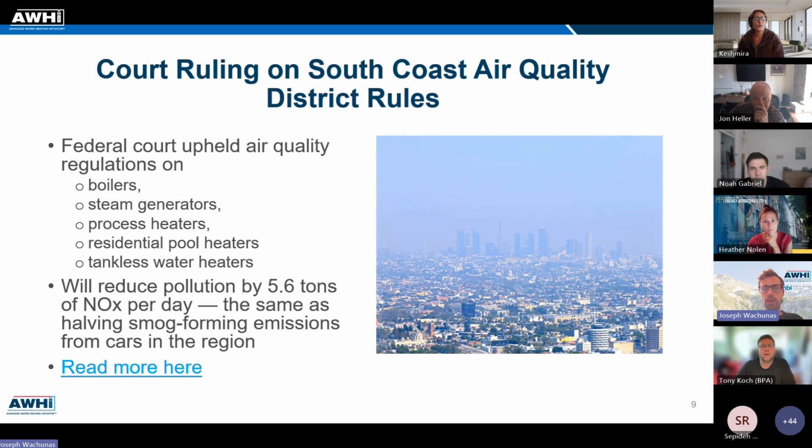Thanks, Joe. Yeah, so just a couple quick updates here on our small commercial study. We have a couple of grocery stores participating in San Diego. It's a couple of Kroger sites, and the M&V installs are going to be happening in August. Just for context, for those who don't know about this project, we're going to be monitoring about 30 heat pump water heaters in small commercial applications throughout California and the Pacific Northwest. So these are two of those newer sites.

We'll also be installing monitoring and verification at a church and a restaurant in Sacramento in August too. So lots of upcoming installs and a lot of cool data flowing in on the performance of these systems. And we also have 10 or so sites identified in the Northwest. So a lot of great recruitment going on. Kudos to Ecotope for recruitment help and all the installs as well. I'm excited in a future AWHI working group call to present on some of the data we have from Ecotope's great dashboarding app. Next slide.

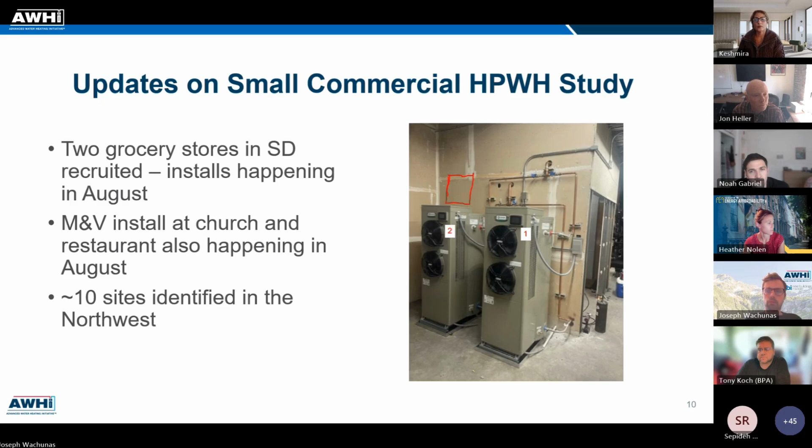They, instead of using a traditional hot water storage, they actually use a glycol mix to basically store thermal energy at very high temperatures and provide quote unquote instantaneous hot water through the heat pump water heater system. In addition to the 4 heat pump water heaters pictured here on the right, there is also a tankless IntelliHot gas backup system. So it's a very cool dual fuel setup here where hopefully gas is going to be of extremely limited use.

The reason we opted for a gas backup here instead of electric resistance, like a commonly used swing tank, is that the electrical upgrades going up several hundred amps of capacity or even more, I think it was 600 to 1200 amps, is what would have been needed. If we didn't opt for a gas backup, it would have been $100,000 roughly just for the service upgrade. So this was a huge money-saving opportunity. It does keep gas in there, but it dramatically reduces costs, and gas is kind of a last resort in the event of a failure or in extremely cold temperatures. You can also see that it's installed in a bit of a buffer zone there, so there have been some cool engineering applications for ensuring there's enough airflow in the space.

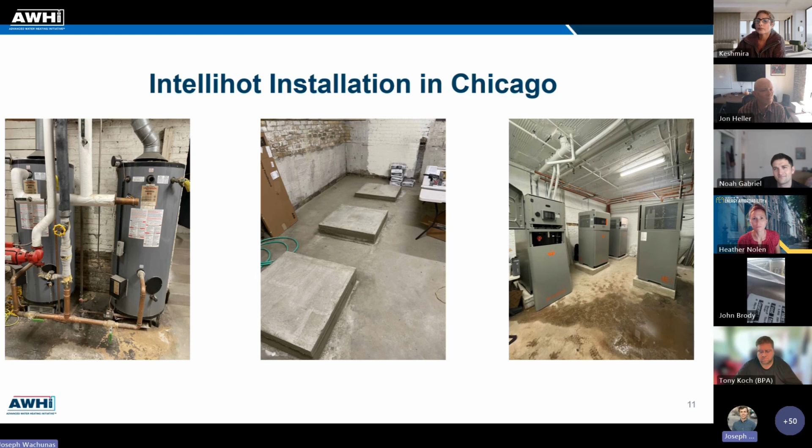Thank you, Joe. Well, I think we're kicking off next - is this, if I flip the title around, is it Made in America Grid-Enabled Commercial Heat Pump Water Heater Systems by chance? Grid integrated, they are. Oh close. AKA, also known as MAGIC, acronym award of the year.

We're going to learn a little bit about some installations of large systems, both in California and New York, pursuant to - is it pursuant to that project or separate from? John, separate from the one we just looked at? Is this part of the MAGIC demonstration, these two studies? Correct. The New York one won't be, though, right? The California one - yep, the California one, exactly. Okay, thank you for the clarification.

So now that we've got our notes straight, I'm just going to introduce it again. As part of a MAGIC proposal, which is part of a DOE funded project, in addition to some work going on with energy affordability, we have some demonstrations of large heat pump water heater projects, both in California and New York. So let's kick into it and start hearing what's going on, and then we'll wrap up with the load shift study. Over to you, Heather.

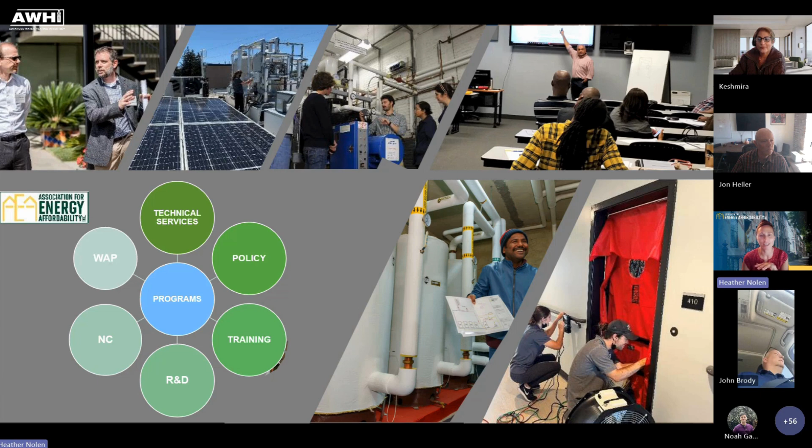So one of our WAP projects is 850 Bryant. This building is located in the Bronx, the northernmost borough of New York City, in a neighborhood called Hunts Point. This is a low-income building, and they were eligible for the Weatherization Assistance Program.

A few facts about 850 Bryant: this is an older building, pre-war, mid-rise, with 48 apartment units. The existing heating system has a hot water distribution, and the electric metering is direct.

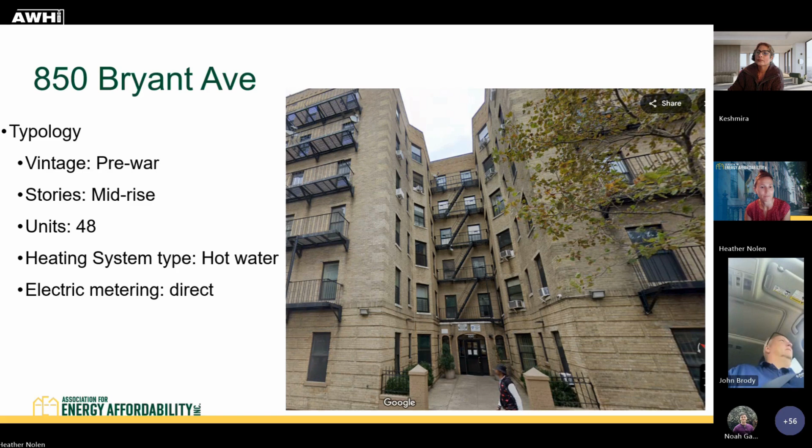So what did we do at this building? The building is still undergoing the Weatherization Assistance Program scope of work, which includes low flow devices for water fixtures. All lighting has been upgraded to LEDs with appropriate controls. We replaced the double hung windows with UPVC tilt out windows, and we're upgrading the ventilation system to meet ASHRAE 62.2. On top of the standard weatherization scope of work, which is a great base for improving energy efficiency and reducing energy usage at the building, the base step for decarbonization, we were able to go beyond that with an electrification scope of work.

This is a pretty deep scope of work that we implemented in 2 phases. Part 1 is what we'll highlight today - that was the heat pump for domestic hot water, where we worked with Lars. The second portion is getting under contract and will be installed this fall - a heat pump for space heating, which will include an upgrade to the existing hot water radiators in the apartments to include low temperature radiator panels.

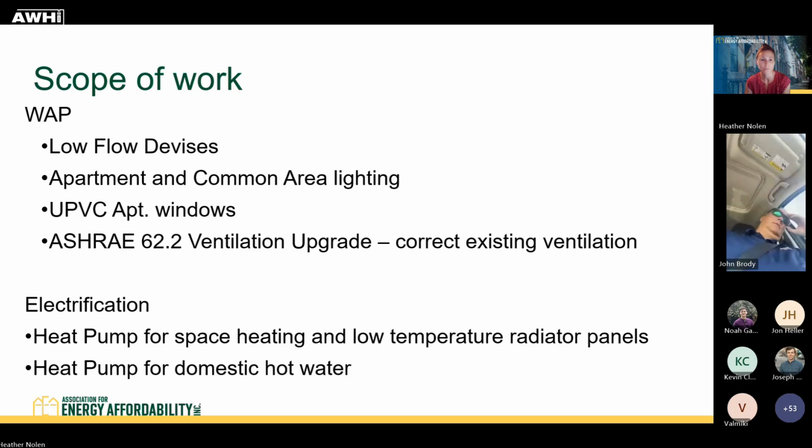These are 2 low temp radiator panels. We're going to leave the existing hot water baseboard in place and tap off of that. In the bathrooms, we're putting a nice towel warmer, and in all other spaces in the apartments, we're going to be putting these low temp radiator panels, tapping right back into that existing distribution network. This will allow us to drop the circulating temperature of the hot water loop significantly and take the benefits of generating that low temp, warm water distribution from the AirMax units.

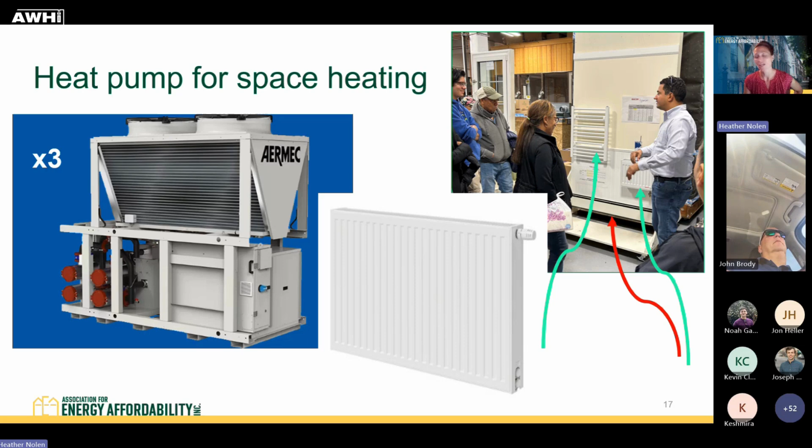These will be installed on the roof this fall. But to get into why we're here, the highlight of what we want to talk about is the domestic hot water electrification at this property.

It was really fun earlier because I heard you say something about throwing a party for heat pumps, and we did. I do want to give a shout out here - I see John Brody on the line, and I'm sorry you weren't able to join us for this party, but we've got John's colleague, Kevin Gauthier here. This is Kevin on the right-hand side, and then we have Greg Rath from Rath Associates on the left - he is our local rep. It was really through the help of working with Rath Associates and working directly with Laars that we were able to find this perfect fit for this piece of equipment at this building and make this project happen. We did throw a big party at it because it was meaningful to us, to Laars, and to the building and the owner.

850 Bryant is part of a larger portfolio of affordable housing in this area of the Bronx. The owner is really mission driven to serve the community. In addition to low income housing buildings, they also have a number of shelters in their portfolio, and they invest a lot in the community. Going beyond providing direct services to residents, they are also interested in making investments in their buildings that serve the building's best interest for the long term - investments like the UPVC windows, making sure their entire portfolio participates in the WAP program, and looking for ways to decarbonize the building, to get off oil, get off gas.

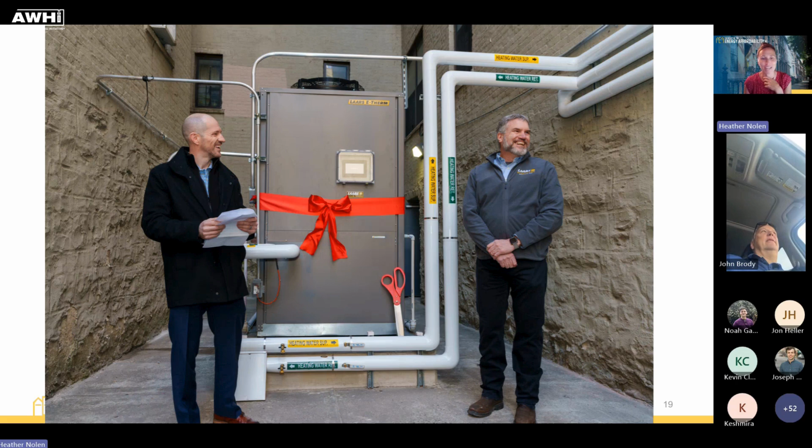So how do we celebrate? Well, of course, the big ribbon cutting, confetti cannons, and there was some champagne.

This project was made possible because we had funding from a lot of entities. Highlighted in this backdrop, our main funders are the Weatherization Assistance Program, and our local entity, HCR—that's New York State Homes and Community Renewal.

We also wrote a grant and were awarded funds, partnering with Enterprise Community Partners, to get a DOE grant for enhancement and innovation. That project was to do the base WAP scope of work and then go beyond weatherization to do electrification. Right now electrification isn't one of the approved measures under the Weatherization Assistance Program, so we used the Enterprise funds to go above and beyond and help afford this electrification program.

We needed a bit more money too, so we were able to use HEAP funds for this project—HEAP stands for the Home Energy Assistance Program. That was another grant we wrote to get funds. So just to make the domestic hot water project happen, we did weatherization first and then used those two funding sources to make it happen.

In order to do that last part of the project I was talking about, the heat pump for space heating, we've brought in two to three more funding sources to make that project happen as well.

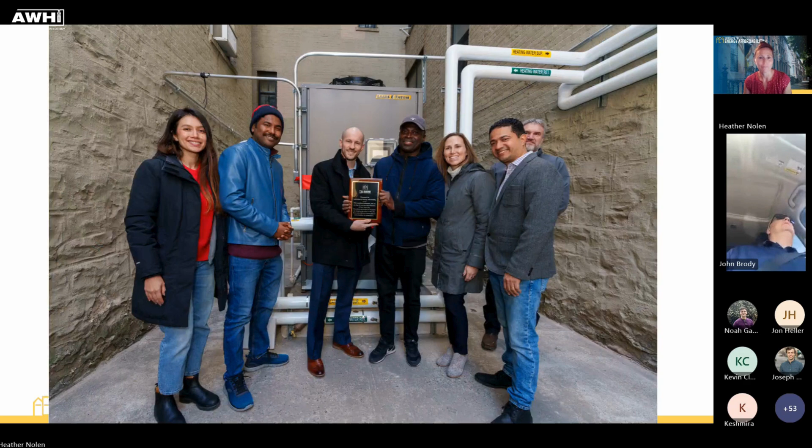Here's a shot of our team along with Greg Rath from Rath Associates, our local rep again.

So that's the unit outside. This is a 48-unit building, and we're able to serve the entire domestic hot water load with just that one unit. We did increase storage capacity inside. When we were first speccing this project, we had thought about using two outdoor units, but we were able to do a combination of storage inside and sizing of the outdoor unit to go with one outdoor unit and adequate storage inside, to pick up 100% of that domestic hot water load.

Currently we do have the gas-fired boiler still tied into the controls—if needed, it can come online. But soon we will have the heat pump water heater replacing that space heating boiler, and after going through this past winter, we're confident we'll be able to use the Laars eTherm to meet 100% of the load moving forward for this project.

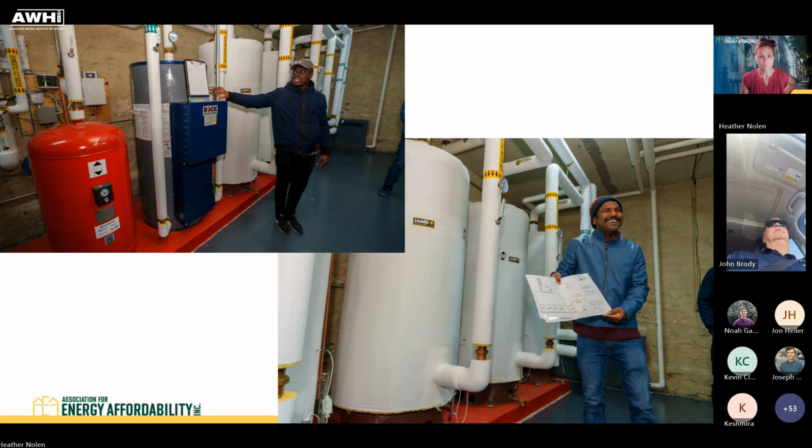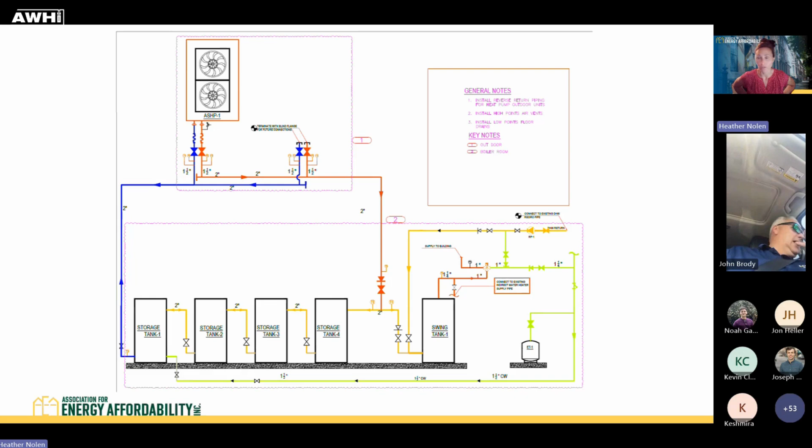Here's a quick overview of the specs of this building and how we were able to wire and plumb this project. One thing that worked out really nicely is we did not have to upgrade the electrical service to the building to meet the domestic hot water load, which worked out really nicely for us.

This building also has—which is really odd for New York City—a really sizable empty mechanical room, so we had space. We were able to put in four of these 200-gallon storage tanks, with nice space inside and close proximity to the outside, letting us site this unit and tie it in. So spacing and configuration really worked in our favor here. It's rare that we find an open space in a mechanical room, but we were able to really take advantage of it in this situation.

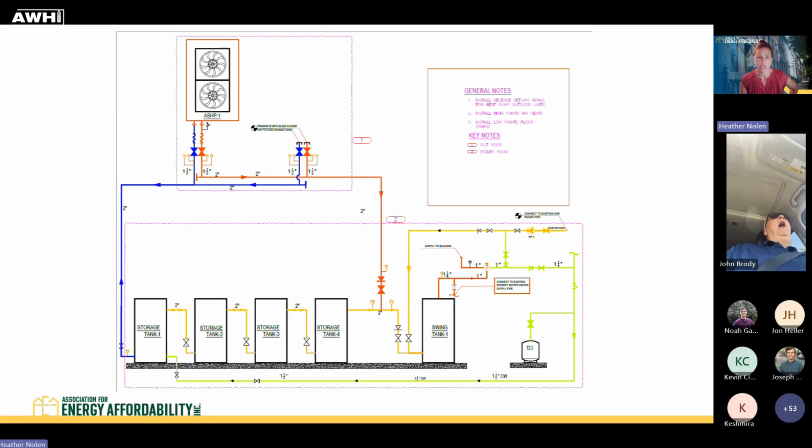I wanted to take a step back to say, why are we doing electrification? Because this project represents the beginning of a sample for us. We've done a few dozen other electrification projects using different technologies, either for domestic hot water or for space heating, and we're continuing to pilot other technologies across portfolios we're partnering with.

But why? In New York City, we currently have a pretty big push to electrify. New York City is looking at reducing our fossil fuel usage, meaning how much oil and gas we're burning. New York City also has some district steam produced with gas. So we're looking to reduce all of that usage and increase the amount of electricity we're using, because the electric grid can get cleaner, while the fossil fuel grid is not getting any cleaner. So we're doing what we can to electrify buildings and reduce energy consumption across these properties and portfolios we're working with.

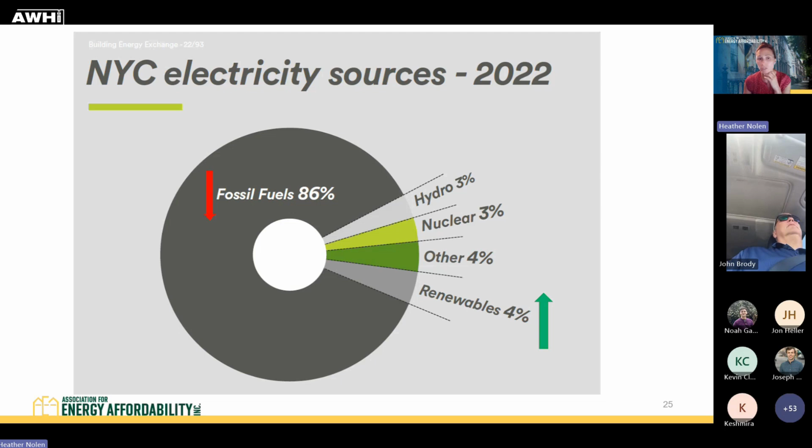This is for improving indoor air quality, improving the energy efficiency of buildings, increasing their sustainability, and also aligning with New York City's Local Law 97, which is a mandate to reduce carbon emissions in buildings. Each building has a whole requirement around thresholds and an accounting calculation for how much carbon it can emit, based on characteristics like your building size and building type.

So this building is affordable rate, 850 Bryant. There were certain conditions for this building, but the owner was really forward thinking and said, we want to jump on board. We believe in this, this is part of our mission. They were looking to reduce how much fossil fuels they were burning on site, and we're interested in this conversion.

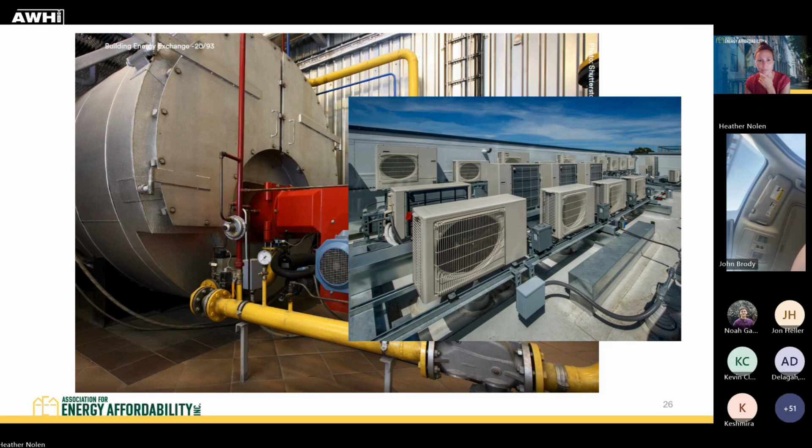Here's just an idea of what's happening citywide — reducing our emissions on the fuel side, moving to electrification. When the city talks about Local Law 97, they're really aggregating all the emissions that a building has — your oil, your gas, your district steam, and the emissions from electricity — to look at what your total emissions are, and then to say, hey, are you over that cap?

I kind of use a limbo stick in my mind when talking to clients — you need to make sure you're under that limbo stick. Otherwise, you need to do what you can to reduce your emissions to get below that, or there are financial penalties that buildings will face when they're looking at their emissions limit. So it was nice to work with an owner who was forward thinking and interested in taking the steps to reduce their carbon emissions today.

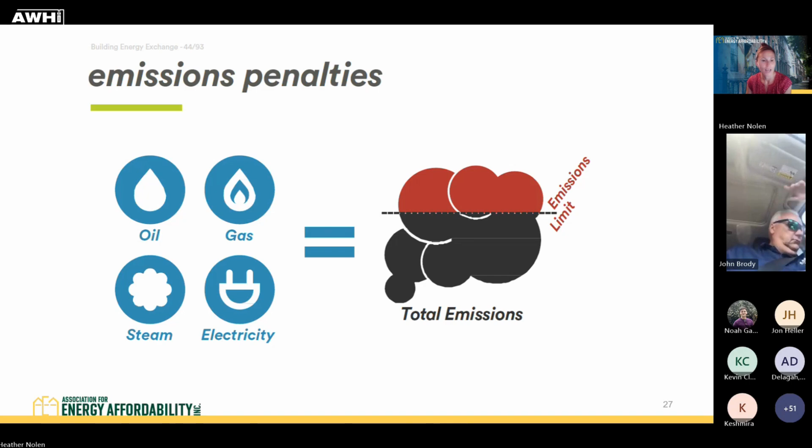I believe that is my last slide. I can pause here if there are any questions. Please tell me if there's something I missed in this quick overview of this project.

What an awesome project. Oh, sorry, go ahead. I was just going to say, what a great project, Heather. Thank you for sharing.

Does anybody want to know how much this project cost? Absolutely — it was just for the domestic hot water install, everything that went into that. We're coming in around $12,500 per apartment. Good to know, that's what I've heard for New York. Crazy expensive, but hopefully it'll come down eventually.

Yeah, even after this project, we think it's going to come down, but the first one is always a little bit more. Could I ask about the character of the owner — is the owner a large commercial real estate institution, or is it like a one-off owner? What's their situation?

Sure, I think they have a decent sized portfolio. It's a nonprofit, family operated owner-developer. They mostly are long-term holds, not producing too much on the new construction side — they're maintaining buildings. And the building is subsidized, market rate, or mixed rate? It's 100% affordable housing. Very good, thank you.

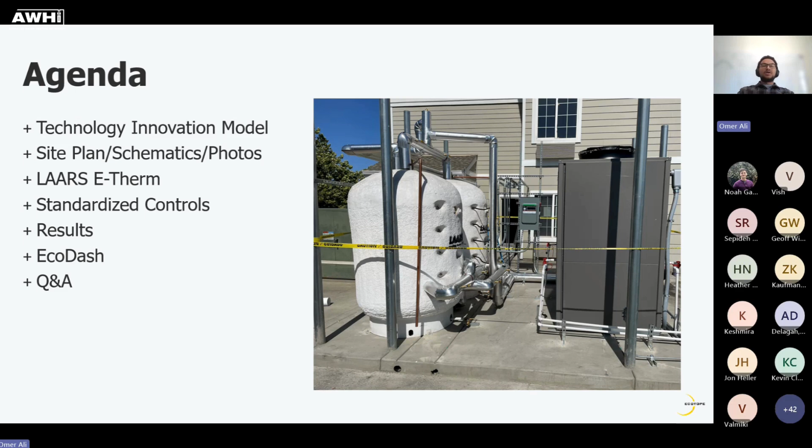So this is our technology innovation model. It was developed between BPA.

I need to be going back, not forward.

There we go. Developed between BPA and Ecotope, its goal is to study new technologies and bring them to market.

Every idea starts as a feasibility paper to study the product and determine the application. The analogy we like to use is that if the heat pump water heater is the engine, then we explore what kind of cars it will work with. Then it goes into applications testing, like testing the engine in a few different cars based on what we know, before actually setting it out in the world and proving that it works.

The next step is a real world demonstration project with M&V equipped, where we collect measurement and verification data and continue the cycle, optimizing the system's design and controls until it's ready for market. This is the step that the LAARS E-Therm is currently at.

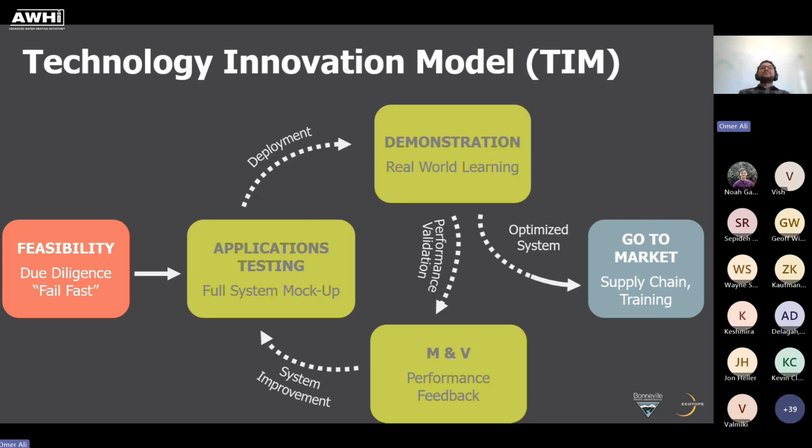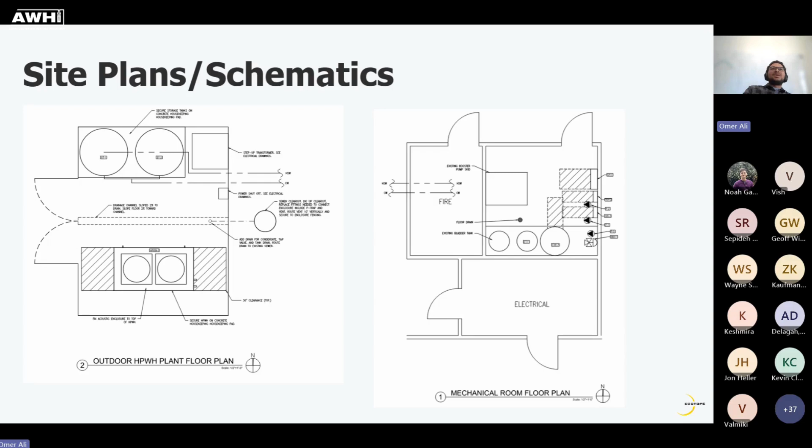Those 2 lines go through a small fire pump room and then hit the mechanical room, where we have our expansion tank, our swing tank, and the 2 instantaneous electric backup heaters I was talking about. And my favorite part, the central controller, the brains for the system.

Let's take a look at the schematic. So this is inside the mechanical room. You'll see on the left here, that's the heat pump.

This is all outside. You have your hot water line, cold water line going to the 2 storage tanks, 500 gallons each, with hot water coming up at the top, cold water coming into the bottom of the 2 tanks. If you follow the cold water line through the bottom, it hits the input for both of the electric backup heaters, which can be bypassed or are bypassed, the expansion tank, and cold water from the city, where we have our flow meter.

Coming off the top of the 2 tanks, we have our hot water also hitting the output of the 2 electric backup heaters, going into the swing tank, out of the swing tank, and into the hot side of the mixing valve. You'll notice that the cold water line is mixing with the return water coming into the cold side of the mixing valve and out to the building.

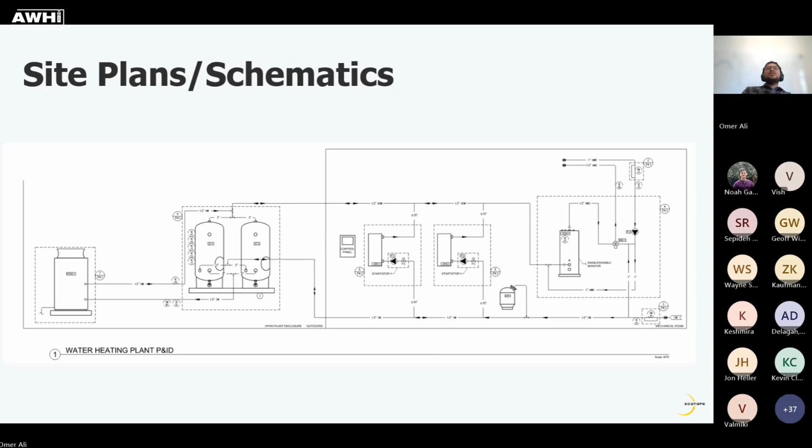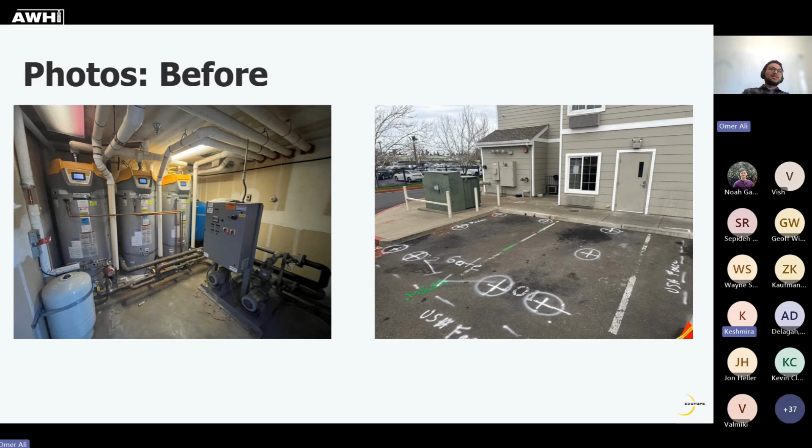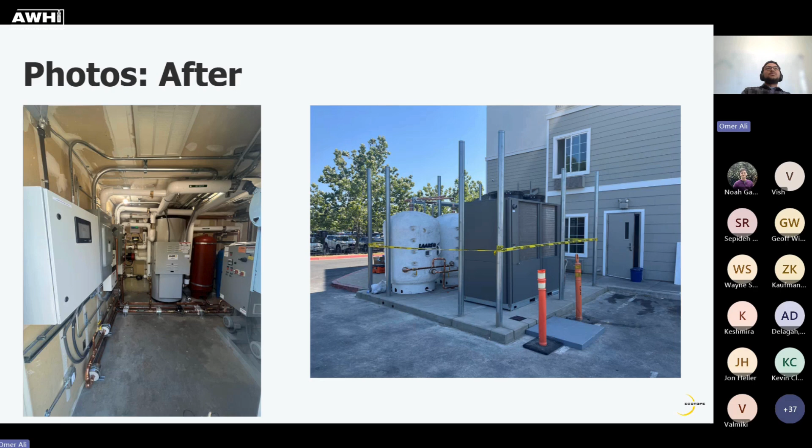Moving on, let's see if there's any data here I didn't talk about. The Laars E-Therm uses CO2, or R744, global warming potential of 1. It can deliver up to 180, though we've only dialed it to 160. Its capacity is 325 MBH, about 95 kW.

And we do have the M&V package. The best part about it is that it's a fully packaged system. It comes with a controller, and the load shift capability is pre-programmed from Laars, and it's great to use.

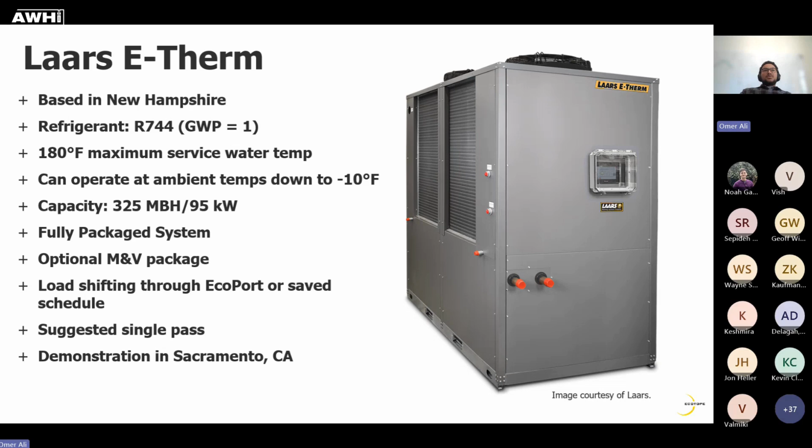I want to talk a little bit about the standardized controls. The design and controls were aligned with the NEEA Advanced Water Heating Spec Appendix H and the utility requirements.

In this case, the utility is SMUD, and they qualify for the load shift incentives, and they also qualify for the California tech incentives for heat pump water heating systems in multifamily buildings utilizing load shift, which is great for the Laars system because it has load shift capability built into the central controller, which was great for us to go test and set up, and allows the system testing to be really easy.

It took us about half a day to do the load shift testing, and it's great to have it all standardized to provide accurate, reliable, and consistent savings.

Once the power meters are set up on site in the next couple of weeks, we'll be able to calculate the system COP using both the boundary method and equipment method from the Advanced Water Heating Spec.

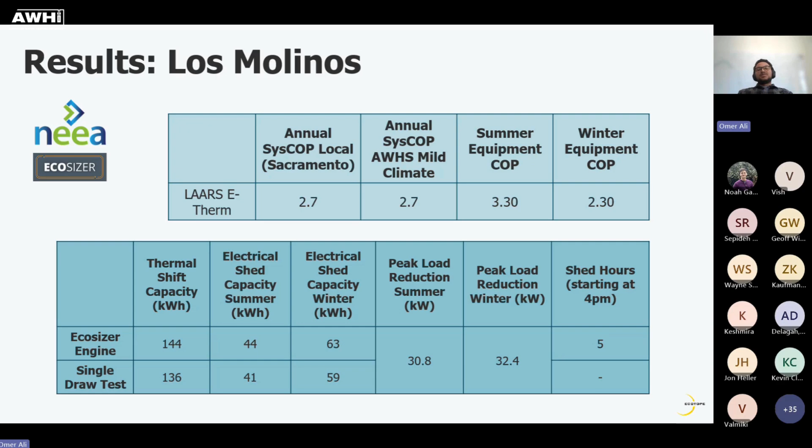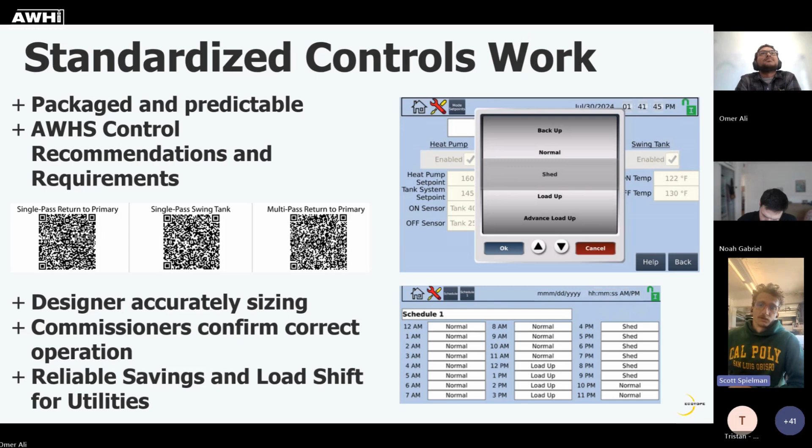Yeah, so Laars, this was a really great part about the technology innovation model and the partnership we had with Laars here, because they designed their controller to accept the inputs that are defined at the advanced water heating spec, and then there's an API that they've got that we can pull the data off the panel through. So it's fairly plug and play for EcoDash, because you install it, you hook up the instrumentation to the inputs that it says in the control panel's installation guide, and then you just connect it up with an API to grab the data.

Right, so the control panel—an on-site box—is basically connecting to your EcoDash server, and is it doing that over some internet connection that's available? Are there different options on the internet connection? Is it always sort of an Ethernet cable or other?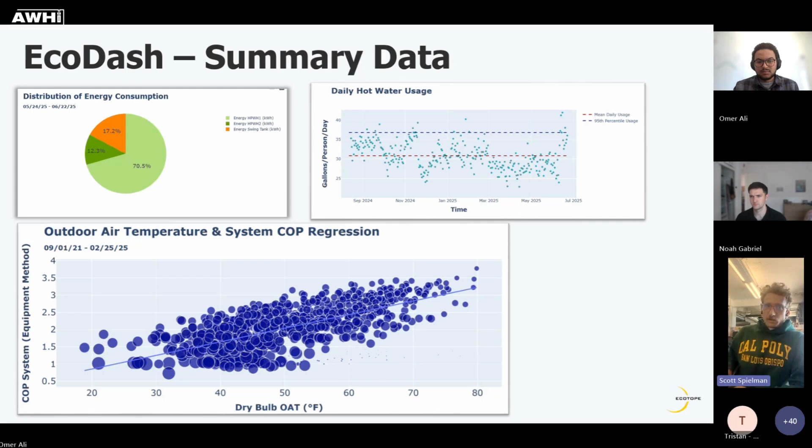Yeah, so on this site, Lars has a cellular connection built into their controller. So it's the same controller that controls the heat pump and controls the whole system. They have an option to do it without the central controller, but if you want the load shifting and all of the monitoring, it makes it a lot easier to use when you add the central controller. So on this site, they had cellular added to their central controller, but you could also just plug it into the building's internet.

Okay, great. So I'm hoping that these questions are helpful for everyone. I only have one more: if in the next Lars installation with this control panel, would somebody be able to just basically notify Ecotope, 'hey, we'd like to have EcoDash involved,' and then they push a button on the controller and it just sort of happens? Or do they have to call you?

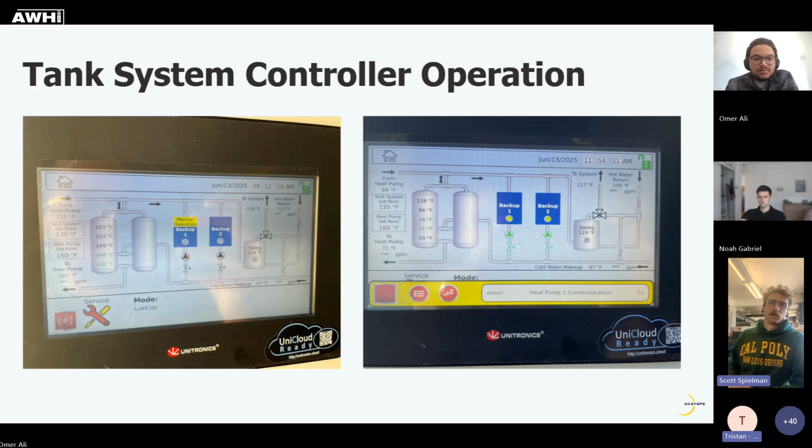You have to know the IP address. I'm trying to figure out how automated it is versus—it's the second point there that we need to know—a little bit of manual intervention.

Yeah, they need to give us the actual address of the equipment and give us permission to grab the data through their API on that specific device. And I would say the other piece is whoever's designing the system would need to make sure the flow meters, temperature sensors, and power meter are spec'd and connected to the panel at startup. But Lars could also do that, since Lars was involved in this project with us, so they know what temperature sensors and flow meters they need and where to put them. Great, thank you everyone.

Any other questions, folks? Geoff, Omer, go ahead. Omer and Scott, curious, working with SMUD, did everything that came with the unit meet their EM&V standards? That's one question.

And the second question is, was or is there the possibility of an ongoing incentive if you maintain that COP, not just your initial COP or after a single year, but over a 10-year period? Was SMUD, or would SMUD, have the appetite to basically say, if you can keep the COP, we will reward that over time?

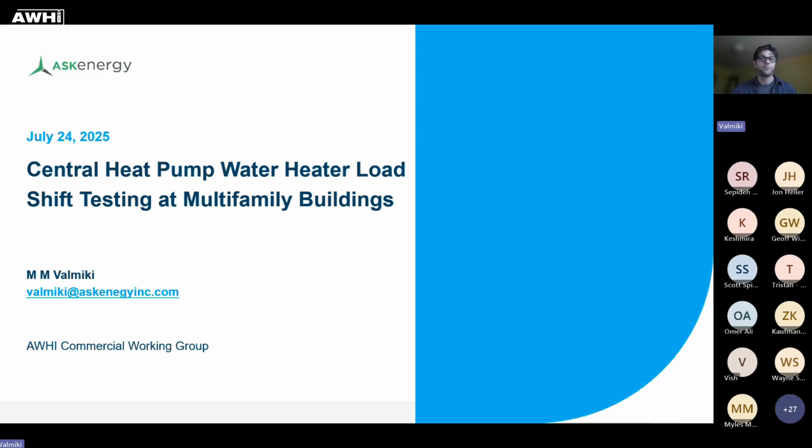Hopefully some new information. I would encourage any of my project partners that might be online to jump in at any time. So just to set the stage a little bit, here are our two buildings. They're about 100 years old in downtown San Francisco. They're high-rise multifamily buildings for a low-income senior population, part of a nonprofit's building portfolio in the area. And these were outfitted with central heat pump water heater systems, replacing existing gas systems. What was it, in 2022, I believe?

These systems use Mitsubishi's QAHVs. Each building has two QAHVs on the roof, connected to a bank of storage tanks in basement mechanical rooms. These are both swing tank configurations, and I'll show you the schematic in a minute, but they also have ample storage, both of them, more than ample storage.

And then I would just kind of highlight one thing that's important about this building that's central to what I'm trying to impart here is that both these buildings not only are on time of use rates, but have demand charges. And these peak demand charges are really central to why we wanted to come back to these two buildings. Not all multifamily buildings have peak demand charges. These do, in California, that is. On the other hand, almost all commercial buildings do. So it's relevant to any building with those demand charges.

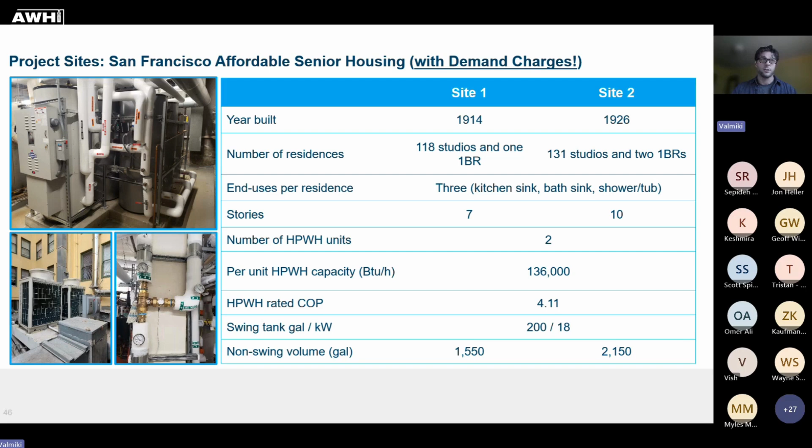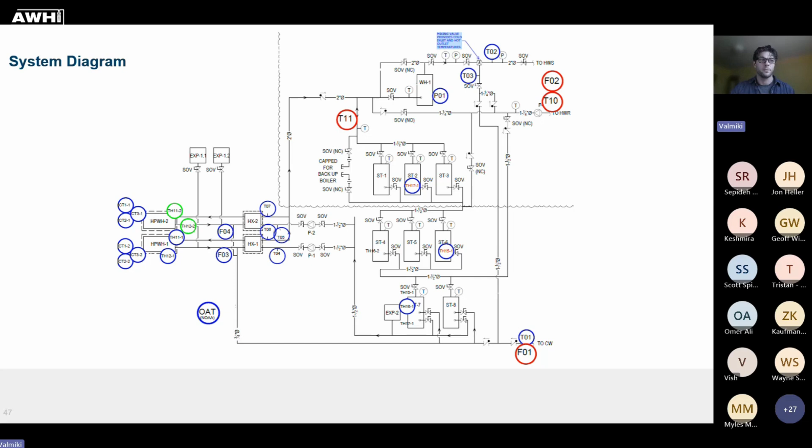Even better, at least in one of my focuses, is the greenhouse gas emission reduction. When we compared it to the gas baseline, the previous system, around 85% greenhouse gas emission reduction. So we were all motivated by that.

And then we tried to do some load shift testing in that initial phase. We were pretty successful at moving quite a bit of the energy consumption, the kWh, out of on-peak periods, but we were not successful in lowering peak demand. We still had the kW up as high as it would have been without load shifting.

What we found when we tried to analyze the cost impacts of that load shifting we tried, those demand impacts were really overwhelming any cost savings we were getting from shifting energy. So we wanted to return and try to figure out how we could lower those peak demands and lower that peak demand charge on the monthly billing cycle. That's really what motivated us to return.

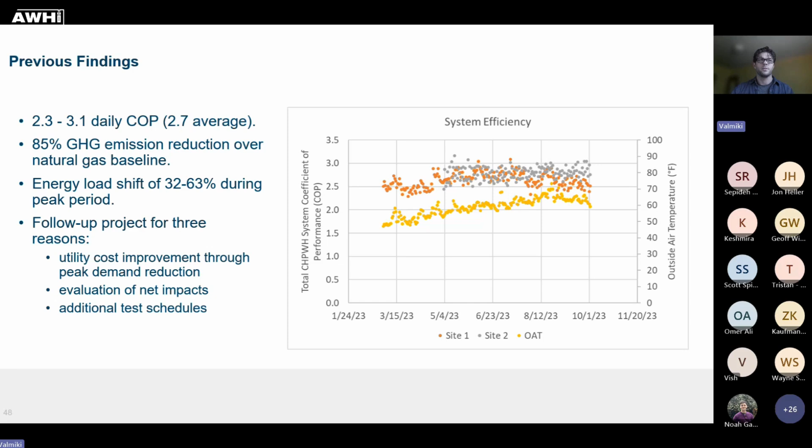The hypothesis was that we could load up during the off-peak or pre-peak hours, and then during the peak hours, use that staging to keep one of the heat pump water heaters off for as long as possible, and also keep the swing tank off since it's locked out, and be able to coast with what was stored, utilizing only one of the heat pump water heaters to maintain our supply temp during those peak hours. The whole motivation is to keep coincident peak demand down, since those demand charges are so impactful.

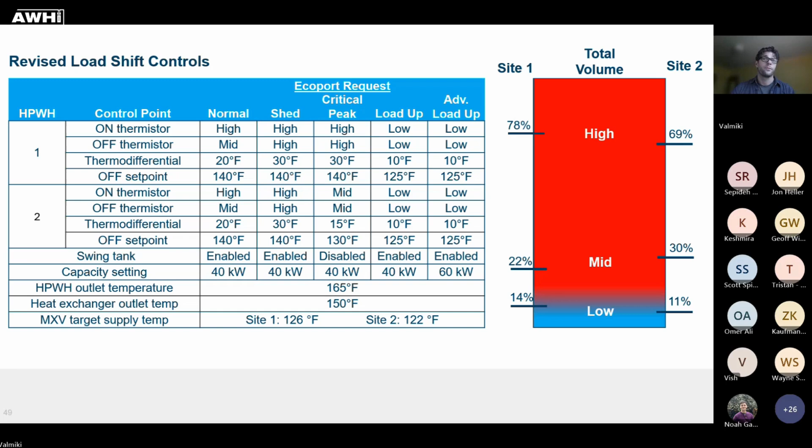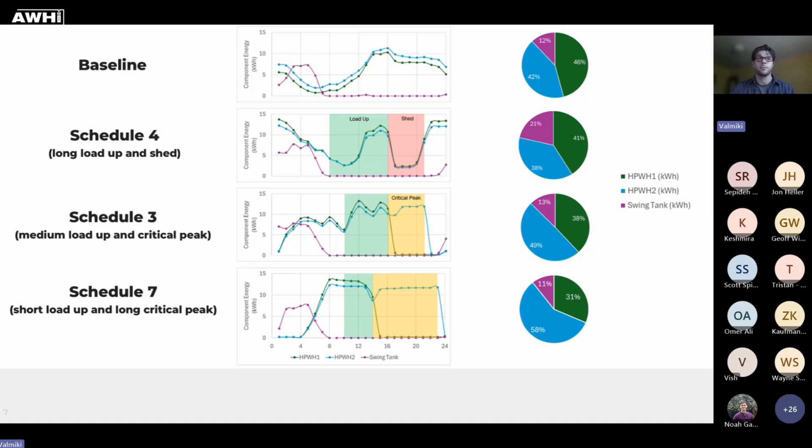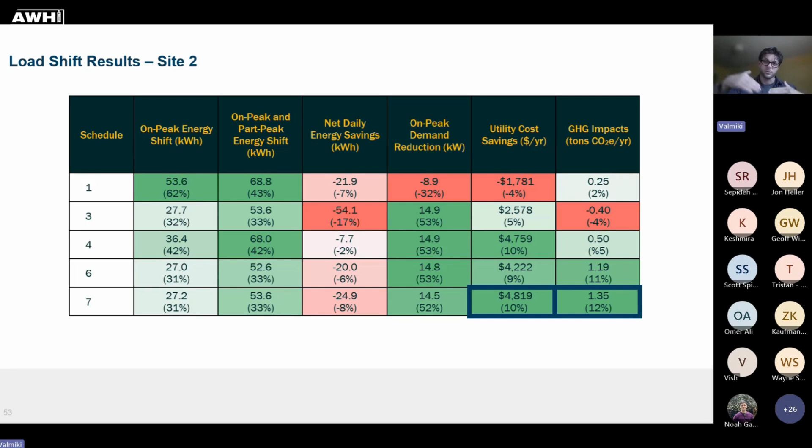So you kind of have to pick and choose which one is most important at this point when selecting which schedule to ultimately employ over the long term. Hopefully over time, those different metrics will come into alignment through rate reform, et cetera.

Just some of the conclusions in our final report that I wanted to share. There's more in our final report you could look at if interested. We found that load shifting was very successful at this building with these demand charges and two heat pumps. So this staging and swing tank lockout worked really well. And personally, I want to emphasize how important and necessary it is for cost-effective, equitable implementation of these systems.

Not just as a utility activated demand response strategy, but as a standard everyday operation. Load shift is important in these time of use situations.

There's some improvement that we could still do. We could go back and do more. You might have noticed that in the staging load shift response, one of the heat pump water heaters did tend to stay on. We could probably be a little more aggressive in the control strategy, have them both go off probably, and then one come back on. So I think there's some room for more improvement there.

And then also we weren't able to add alternating lead-lag of the staging position of the two heat pump water heaters. That's an issue for evening runtime and lifetime of these products that would impact the customer. So I think that's important for Mitsubishi and others to definitely make available.

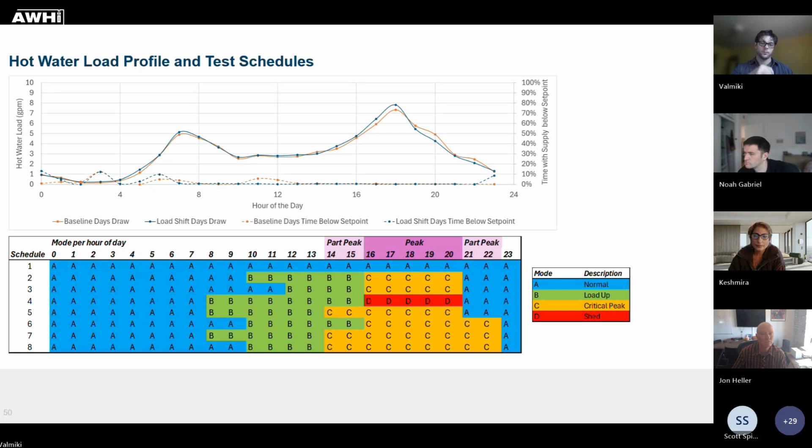Yeah, I just provided a link there too to a modeling study we did that touches on this, comparing different load shapes and load shift time periods. Thanks, Scott.